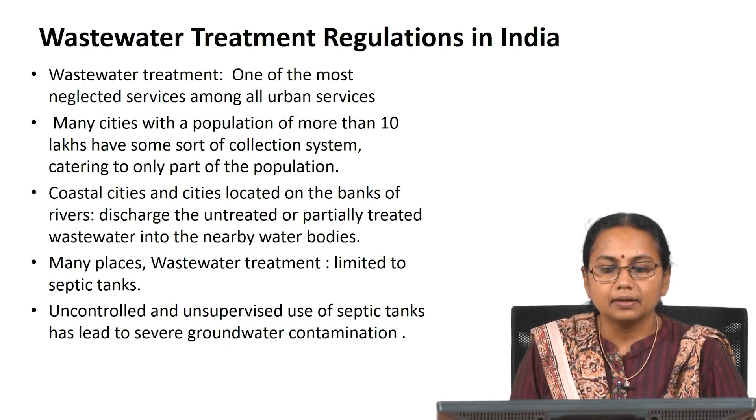We can see the wastewater management scenario in India in these slides. This is 2011 data. In 2011, around 39,000 to 40,000 million liters of water per day is generated in the domestic sector, whereas around 15,000 plus in the industrial sector.

Most of the time we think that industries are the most polluting sources, but the truth is the other way. Around 60% of the industrial wastewater is getting completely treated as per the norms, only 40% is getting discharged untreated. These are the small and micro level industries.

But when it comes to domestic wastewater, you can see here the domestic wastewater generated in urban India and rural India. Urban India generates around 40,000 million liters per day, and rural India generates around 77,000 plus. In urban India the treatment capacity is only around 11,000 plus, and in rural India it is only 772.

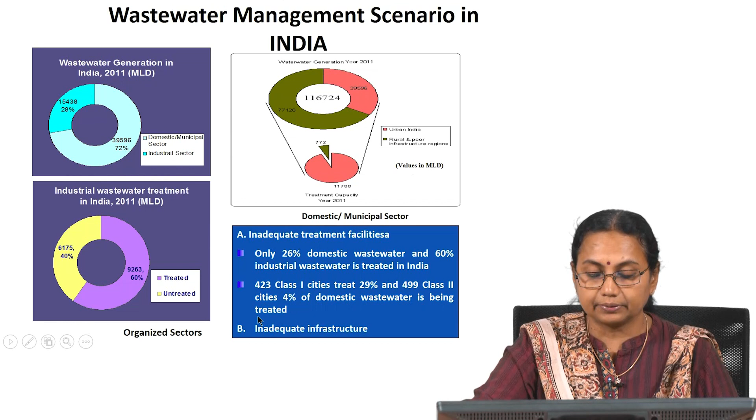You can see that only a very little part of the wastewater is getting treated. I have summarized here: only 26% of domestic wastewater and 60% of industrial wastewater is getting treated in India. 423 class 1 cities treat around 29%, and 499 class 2 cities treat around 4% of domestic wastewater. The major reason is inadequate infrastructure.

Now we know that a lot of emphasis is given on Swachh Bharat and cleaning and wastewater management and treatment. So if you create much more infrastructure, you see the condition here: treated wastewater is around 11,788 million liters per day, and untreated is around 27,808 million liters per day.

But in 2035, the treated wastewater quantity will definitely be increasing significantly. It may go up to 65,228 million liters per day. But you can see the untreated wastewater quantity is also increasing, becoming around 28,269.

The reason is, though infrastructure is developing, it is not able to meet the quantity of wastewater getting generated in India. As the population grows, the amount generated will be increasing significantly. This is the wastewater generation projected for the year 2035.

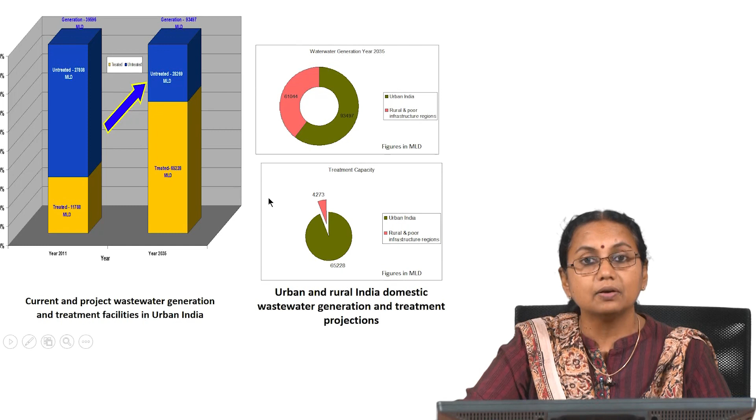This is rural, around 61,000 plus, and urban India around 93,000 plus, and rural treatment will be only 4,000 something, while urban India it will be around 65,228. So though the infrastructure develops, the pace at which it is developing, the coverage or the untreated wastewater getting into our rivers and water sources will be increasing day by day.

This shows the availability and type of toilets as per the 2011 census. In rural India in 2011, open defecation was very prevalent, around 67.3%. Now it has reduced significantly because of the Swachh Bharat campaign. Urban India also was not that good, around 12.6% was practicing open defecation.

Sewerage facilities were available in only 32.7% of urban India, and around 38.2% is still depending upon septic tanks, with so many other options also practiced in urban India. So if you see all over India, open defecation is still there, but if you look into sewerage coverage, it is only around 11.9 or 12%, and septic tank coverage is around 22.2%.

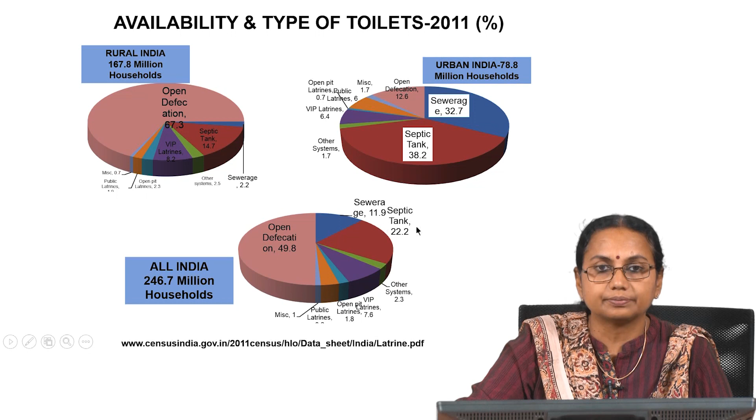So when we talk about wastewater management, we have to realize the ground reality. Most of the time when we talk about wastewater treatment, we think about a centralized treatment system, but that can be achieved only in places where there is sewerage coverage. So when the wastewater is not treated and gets into the rivers, what will happen? All our rivers are highly polluted.

So why should we bother about the pollution? Economic losses due to improper sanitation is huge. Around 73 million working days are lost due to waterborne diseases, and around $600 million are lost because of this per year, and around 6.4% of Indian GDP is lost due to improper sanitation. Economic loss in the tourism industry in India is around $448 million per year, because people want to go to a clean and pristine area for tourism, not a river like this, highly contaminated with domestic and industrial waste and solid waste.

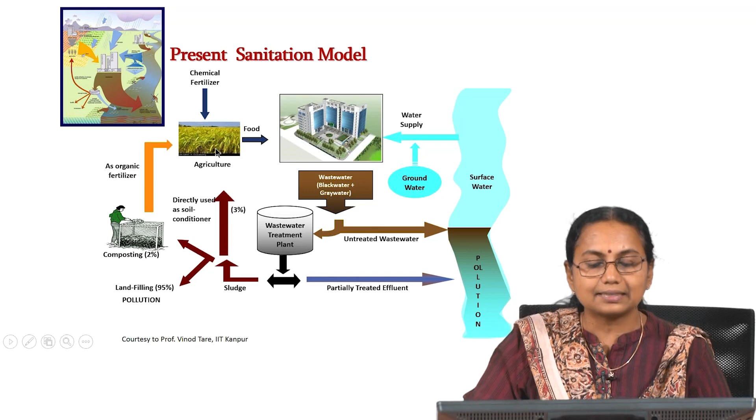So this is what is happening - all the chemicals, the untreated or partially treated wastewater, everything is going to the river. This river water is being used by cities downstream, so indirectly all of us are drinking the other person's wastewater without much hesitation.

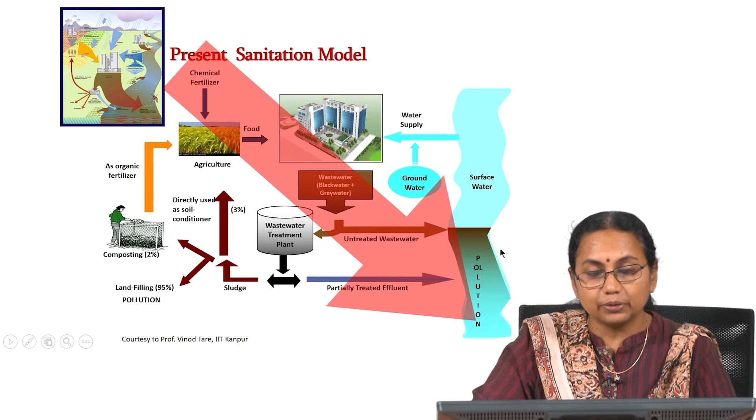When we talk about wastewater being treated and reused for various purposes, people have a psychological inhibition, but every day we are doing that without our knowledge. Today, wastewater management is based upon centralized wastewater treatment systems.

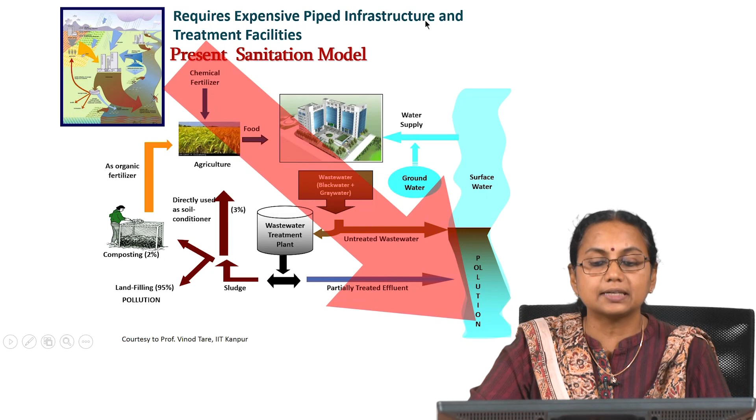Whatever wastewater is generated in the city is collected through pipelines, which we call sewers. To carry the waste through the sewer, we need large quantities of water, because otherwise solids will get deposited there. This requires expensive pipe infrastructure and treatment facilities, and encourages water consumption, because the pipe should have minimum velocity, otherwise all the solids will accumulate and clog the pipeline.

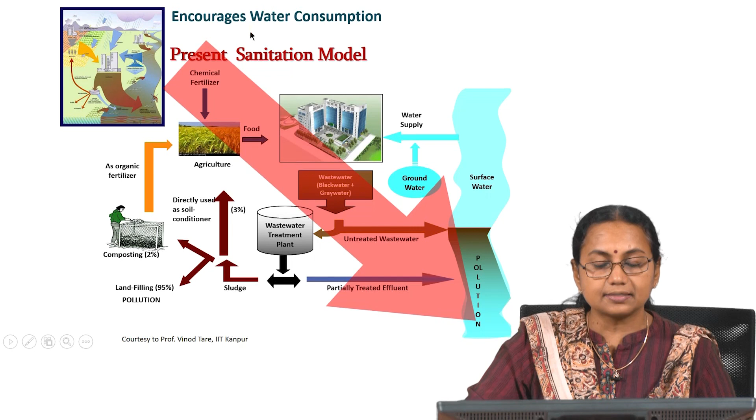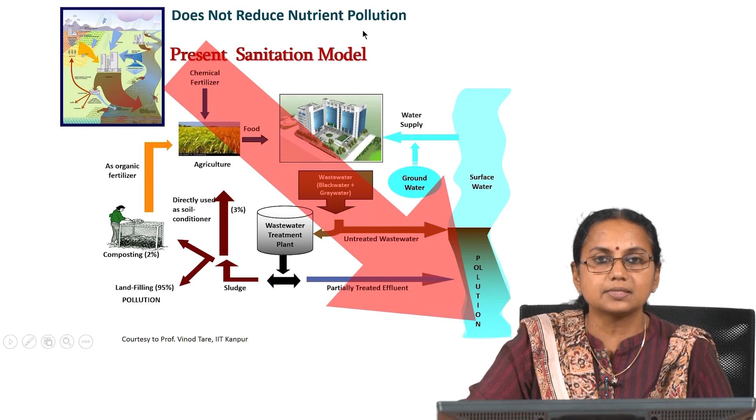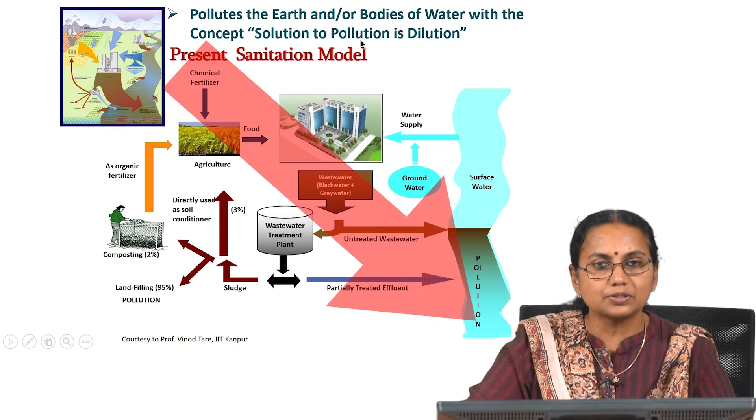So centralized wastewater treatment systems encourage water consumption, and most of our treatment systems do not reduce nutrient pollution, because they are not designed for that. This pollutes the earth and water bodies, with the concept that the solution to pollution is dilution, but our rivers do not have much water, so entire water bodies are getting contaminated. It is not sustainable.

Now there is a paradigm shift in the recent past. In the past, wastewater was considered a problem; now it is considered a resource. In many places, zero liquid discharge is being practiced - whatever wastewater is generated, you treat it to the required level for the specified beneficial use and recycle it completely within the community or facility. That is known as zero liquid discharge, meaning no liquid is getting discharged.

Examples are many - the NEWater scheme in Singapore, where the entire water is treated and put into rivers and lakes, and they are reusing it.

Treated domestic wastewater for industrial use; even in Chennai many industries are practicing this. Zero discharge norms for major industries, and it is coming in a big way wherever water stress is there. And recycled water for domestic use, may not be for drinking purposes, but for all other secondary uses like toilet flushing, gardening, cleaning, etc. Treated wastewater for groundwater recharge and irrigation.

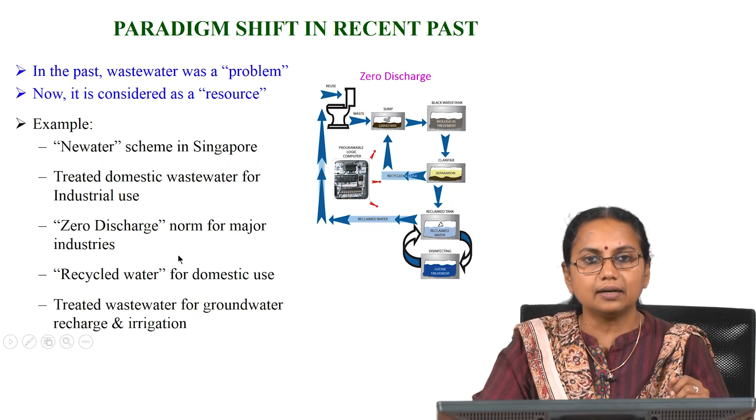Here we have to be extremely careful. If you want to use the treated wastewater for groundwater recharge, the quality of the treated wastewater should be as good as drinking water. Otherwise, what happens? The groundwater will get contaminated. Once the groundwater gets contaminated, treating it will be very, very difficult.

So, when we talk about wastewater reuse, the treated wastewater can be reused for multiple purposes, like recreational and environmental uses. For regenerating lakes and ponds we can use properly treated wastewater, otherwise it will lead to much more problems. Marsh enhancement, stream flow augmentation, because if the rivers are not having the environmental flow, how can we get the water? You treat all the wastewater to the required quality and put it back to the river, so that stream flow augmentation can happen. Then it can be used for fisheries and for wetlands.

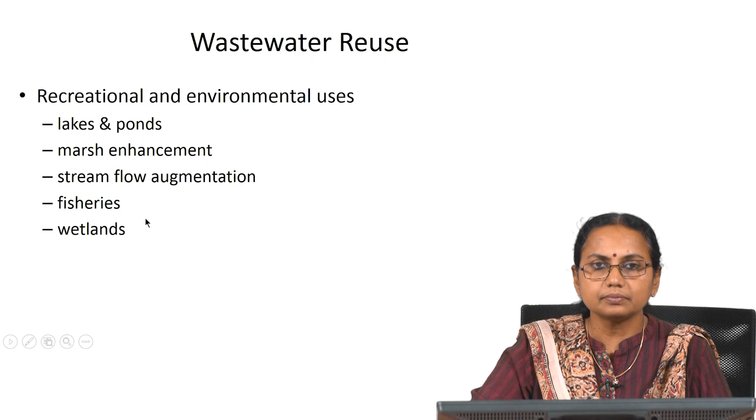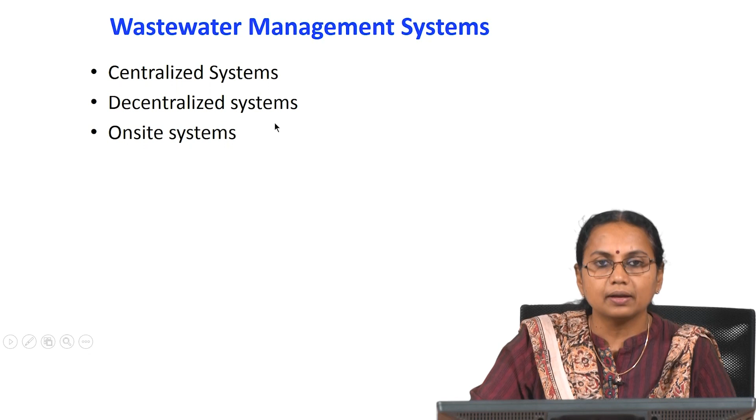Then when we come to wastewater management systems, usually we classify them into three categories: centralized systems, decentralized systems and on-site systems. So, when we talk about a city or a town, if you want to achieve 100% wastewater management, it should be a combination of centralized systems, decentralized systems and on-site treatment systems. Now, we will see what these centralized and decentralized systems are.

So, a centralized wastewater treatment system means all the wastewater generated in the city or town is collected through pipelines. These pipelines may be hundreds of kilometers long, and all the wastewater is collected and taken to a low-lying area in the outskirts of the city, wherever you have enough land, treated there and discharged. That is the centralized treatment system.

This is one of the towns in Tamil Nadu, Trichy. Here you can see an example of a centralized sewage treatment system. These are the pipelines, all the sewer lines, and all the wastewater is getting collected and brought to an area here, and here it is getting treated far away from the city.

But here we have problems. Some areas which are low lying compared to the major pipeline are very difficult to connect to the existing sewer systems. The reason is, if you want to get connected, we have to have pumping stations and all. So, the operation and maintenance cost of such systems will be huge. So, it is advisable to have a centralized system, and

whichever area is not possible to connect to the centralized sewer system can have a decentralized wastewater treatment system. That means, for that location you provide a small treatment. And if you have some isolated houses, providing the sewer network will be very costly. In such cases you can go for an on-site treatment system. That means, only for a single house or a cluster of houses you can have a very small treatment system.

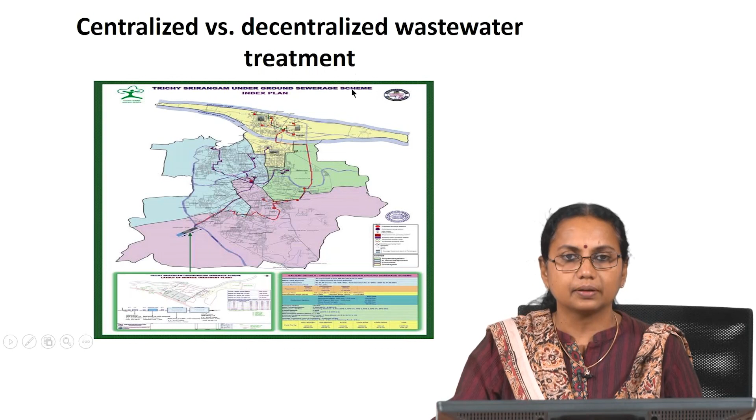So, this is a centralized wastewater treatment system. That means the entire wastewater is collected through the sewer network, transported to a far away place, treated and discharged there. In a decentralized wastewater management system, what we are doing is, wherever the wastewater is generated, in that area itself it is getting collected and treated.

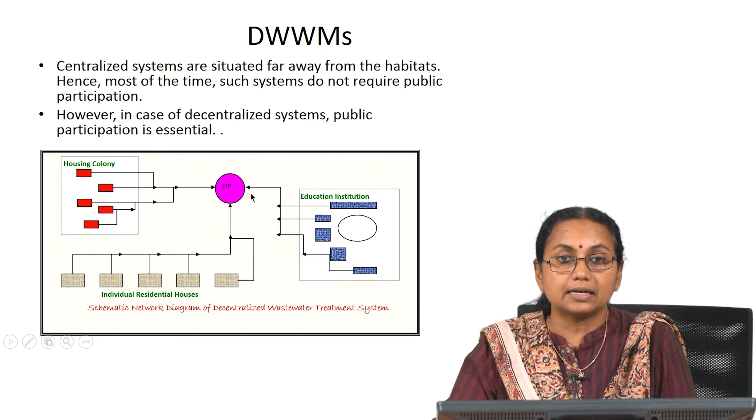So, if you are thinking of reusing the treated wastewater, it is always economical to go for decentralized wastewater treatment systems, because in a centralized system we are taking all the wastewater to a place far away from where it is generated. Then if you want to reuse it, you have to pump it back to the place where it is required, so the pumping cost will be very high. Here we are treating the wastewater wherever it is generated, so reuse will be much easier.

So, on-site treatment systems means for individual houses or a cluster of houses we are providing the wastewater treatment systems, and in India, the on-site treatment system mostly consists of a septic tank.

Because in the septic tank around 50 to 60% of organic matter removal is taking place, and a large number of pathogens will be coming out in the septic tank effluent. So, if you just discharge it into the open drains, there will be significant groundwater contamination. So, here what we are doing is spreading it into a large area in the soil. So, soil acts as the treatment medium, and the waste is getting treated.

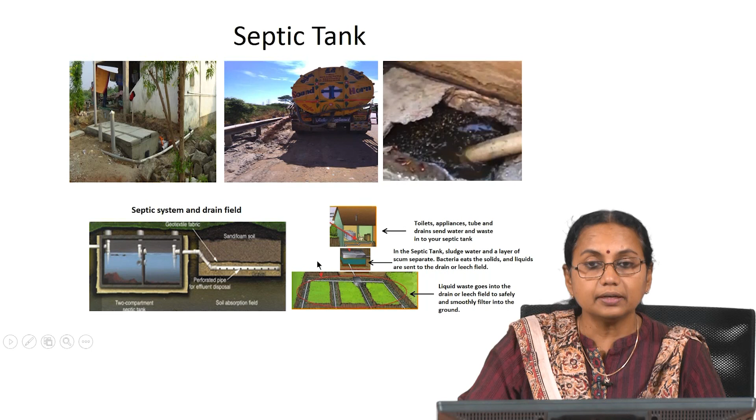So, problems of improper wastewater management we have already discussed. Contamination of surface water sources: most of the rivers in India, we can talk about Ganga, Yamuna, Adyar, Coovum, any river you take, are getting contaminated. And if you are not designing and operating the on-site treatment system properly, again contamination of groundwater can happen.

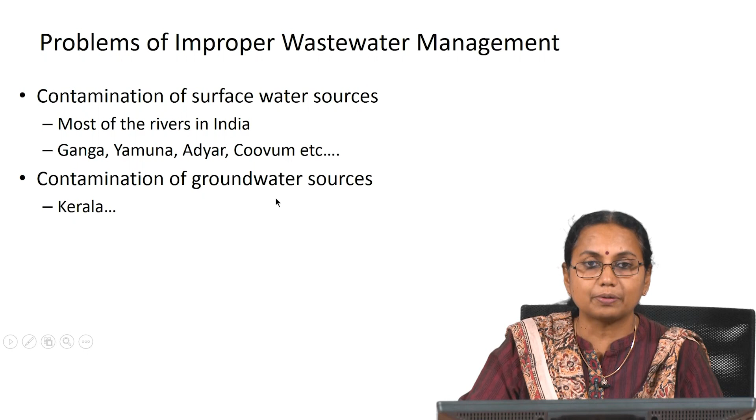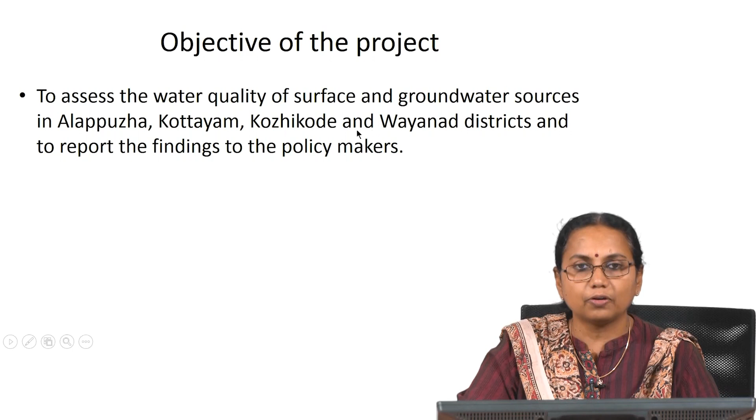I will talk to you about an example from Kerala. So, this is the case study from Kerala. We all know that in Kerala open defecation is almost nil, and all social development indices are very good. They have very nice rivers, and mostly the environment is clean, but what is the status of the groundwater? So, we have done a study to monitor the surface and groundwater quality in 4 districts of Kerala, just to find out how the quality is.

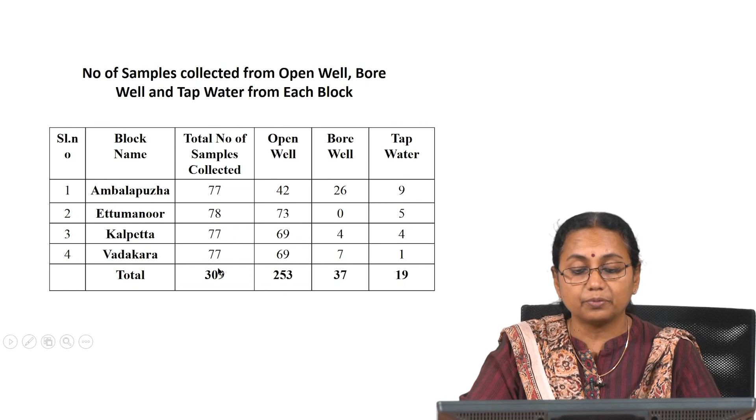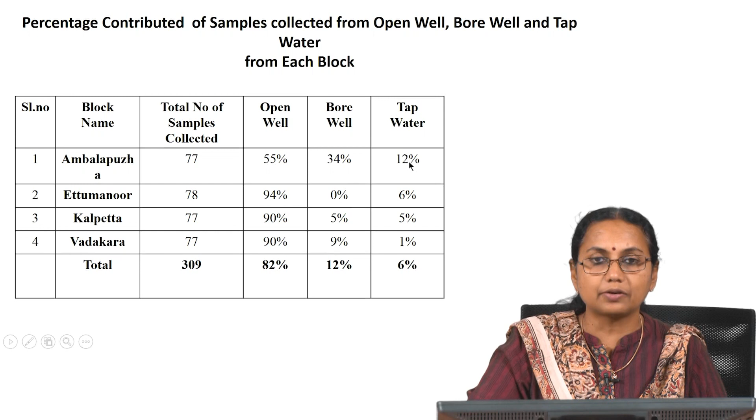So, we collected around 309 samples from open wells, bore wells and tap water. Here the number and percentage of open wells, bore wells and tap water I have shown. You can see the bacteriological quality in open wells in all the 4 blocks during monsoon: around 68% of the wells are having fecal contamination and only 32% wells are free from it. After monsoon, it is around 58% and 42%.

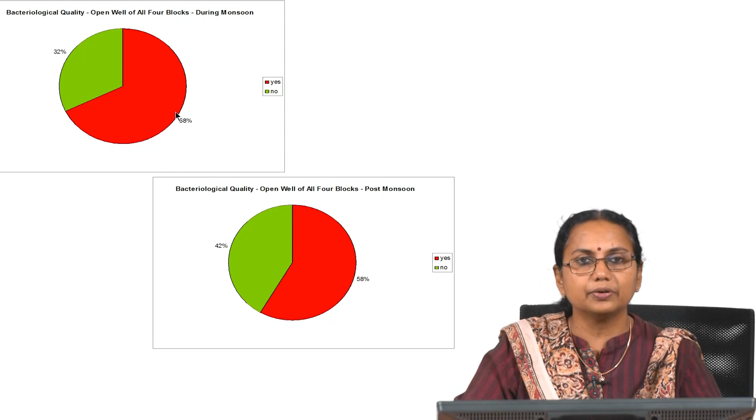Because the groundwater table is very high, things are getting into the groundwater. In open wells, many times they do the disinfection in the well itself, so many wells are getting cleaned. But many times the bore well is dug in the open well. So, the chlorination is not effective and the aquifers are getting interconnected. So, the bore well is contaminated and disinfection is not happening; that is why the bore well is showing much more contamination.

Now, we will look into what are the wastewater treatment systems, or how can we treat the wastewater. Usually the wastewater system generally comprises of 3 parts. We have a primary treatment, a secondary treatment and a tertiary treatment. The objective of the primary treatment is to remove suspended, easily settleable and floating material, and secondary treatment is provided to remove colloidal and dissolved organic matter, and tertiary treatment systems are provided for polishing the secondary treated effluent to meet the reuse or discharge requirements.

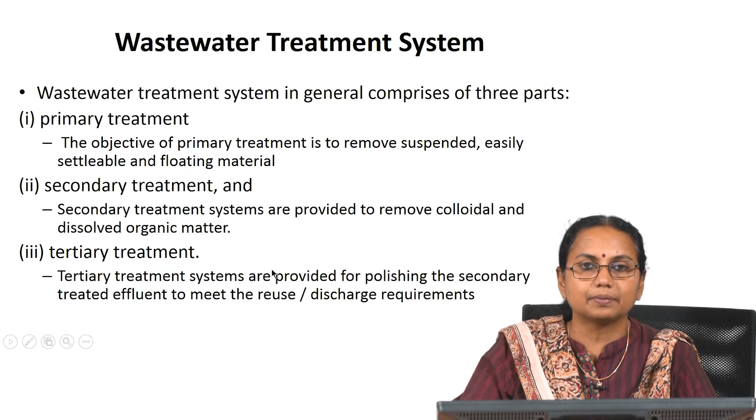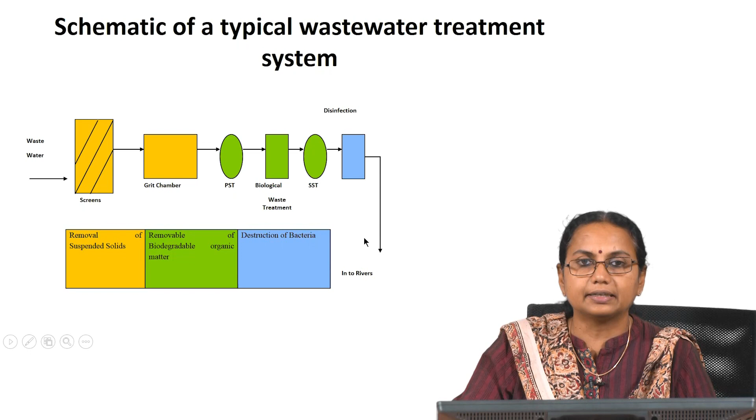This yellow color shows the treatment units used for removal of suspended solids, green for removal of biodegradable organic matter, and blue for destruction of bacteria, and after that it is discharged to rivers. But if you want to reuse it, we have to give further treatment. So we can treat the raw wastewater in a better way and recycle within the system.

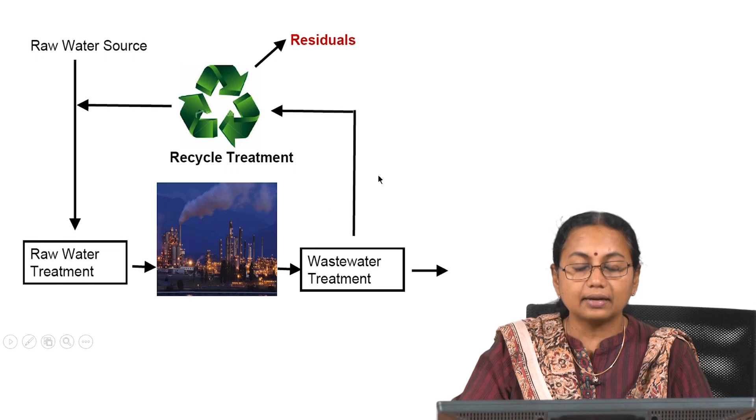So, what are the wastewater treatment processes and technology? There is no dearth of technologies. We have n number of technologies available for the treatment of wastewater. A few are waste stabilization ponds, constructed wetlands. These are engineered natural systems, cost effective, and you do not need any electricity or mechanical devices. Then UASB, upflow anaerobic sludge blanket reactor, moving bed biofilm reactor, activated sludge process, extended aeration process, sequential batch reactor, membrane bioreactor. Like that we have all types of technologies available; depending upon the treatment quality requirement and your space availability, you can select appropriate treatment technologies.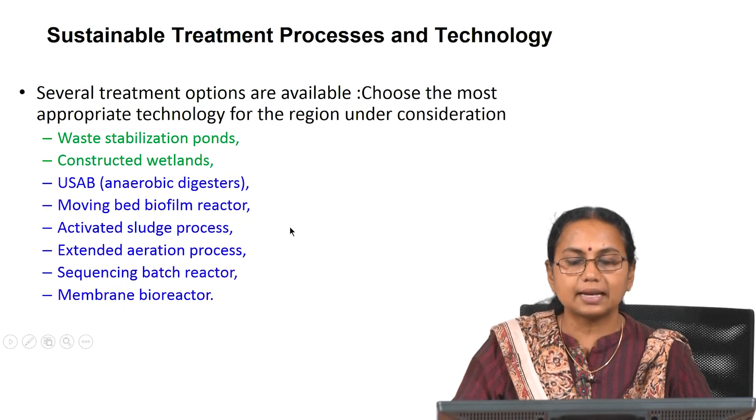And in wastewater, especially for domestic wastewater, most of the time we go for biological process. The reason is the wastewater will be containing a lot of suspended, colloidal and dissolved organic matter which are highly biodegradable. So, instead of going for chemical processes, we usually adopt biological process.

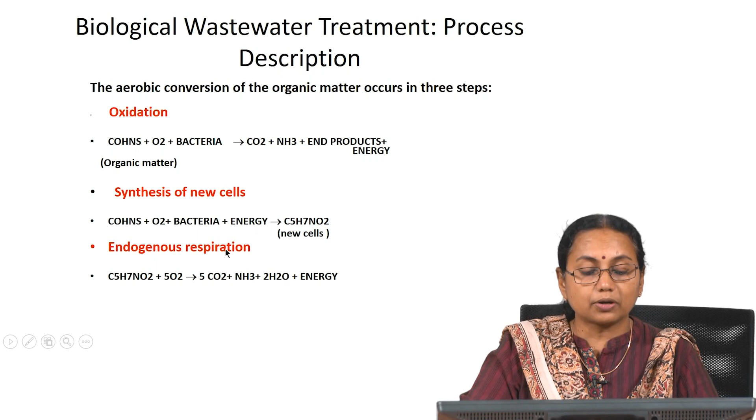In aerobic process, what happens? Your organic matter, in presence of oxygen, bacteria or other microorganisms convert the organic matter to carbon dioxide, ammonia and end products. Some energy also will be generated. This energy will be utilized for the synthesis of new cells. The new cell synthesis is like this: organic matter, oxygen, bacteria, energy is generated and it is giving new cells. And sometimes, if the organic matter content is less, the microorganisms will use the existing microbes and they get the energy.

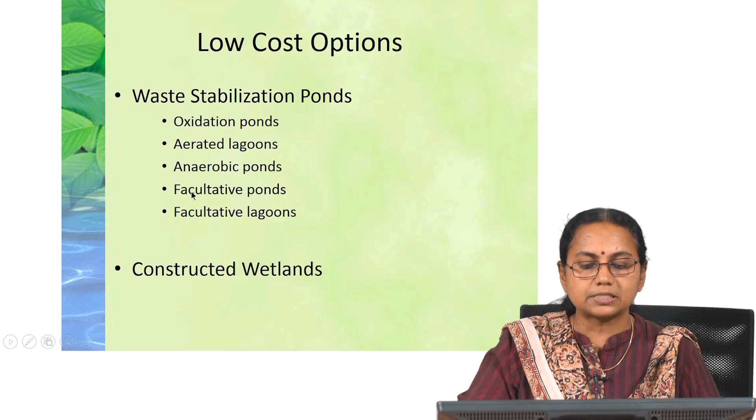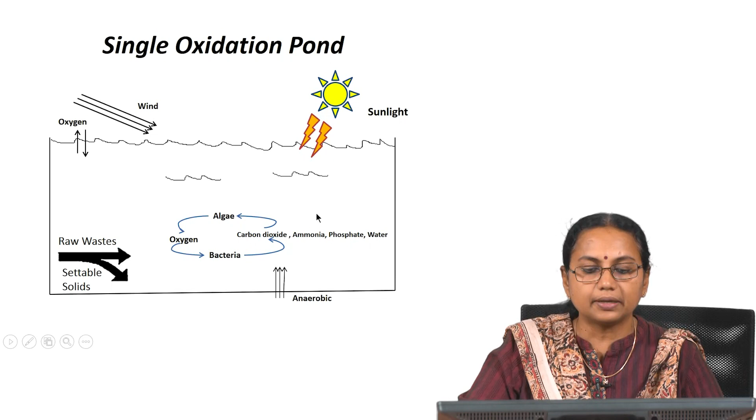And low cost options, as I told, you have oxidation pond, aerated lagoon, anaerobic ponds, facultative lagoons, constructed wetlands. This is a single oxidation pond. Here you can see that a symbiotic action of algae and bacteria is happening, and as a result the treatment is happening. And this is a constructed wetland. Here you have a watertight tank and you will be having plants and the matrix on which the microorganisms also will be there. So, you have a combination of physical, chemical and biological action taking place, and you will be getting the treated wastewater.

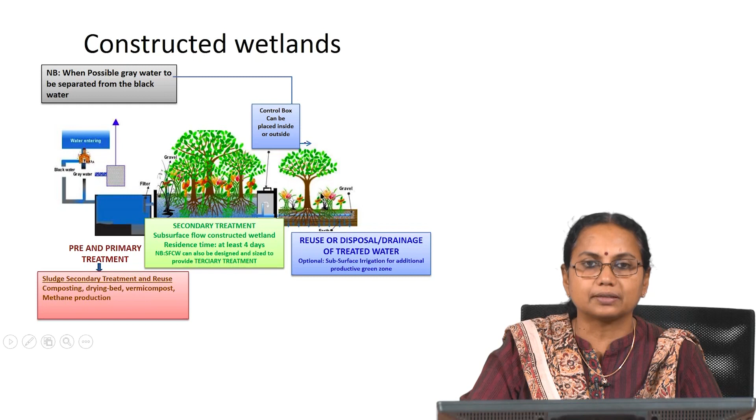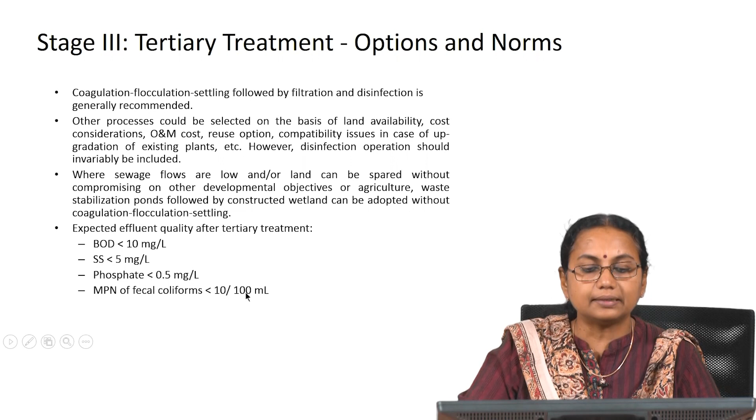And tertiary treatment, as I explained already, based upon the treated wastewater use, you can select your tertiary treatment. Either you can go for coagulation, flocculation or other process. Most of the time for toilet flushing or other secondary uses, the expected quality of tertiary treated water is BOD less than 10, suspended solids less than 5, phosphate around 0.5, MPN less than 10 per 100 millilitre. And tertiary treatment can be nutrient removal, phosphorus removal, chlorination, carbon adsorption or dual media filter, ultrafiltration, or even you can go for reverse osmosis and disinfection.

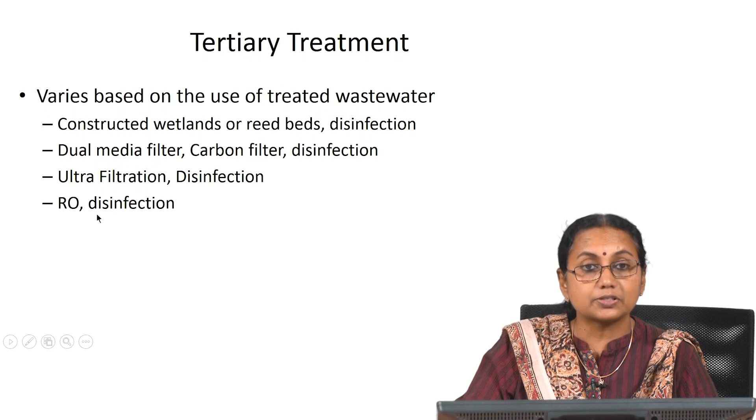So, what is the present scenario? Wherever wastewater is collected, mostly treatment plants are not there. Places where treatment plants exist, enough wastewater is not collected. Wholesome approach is missing in many places. But now cities are coming up with city sanitation plans. Most of the time the funds are provided only for asset creation; operation and maintenance is not available.

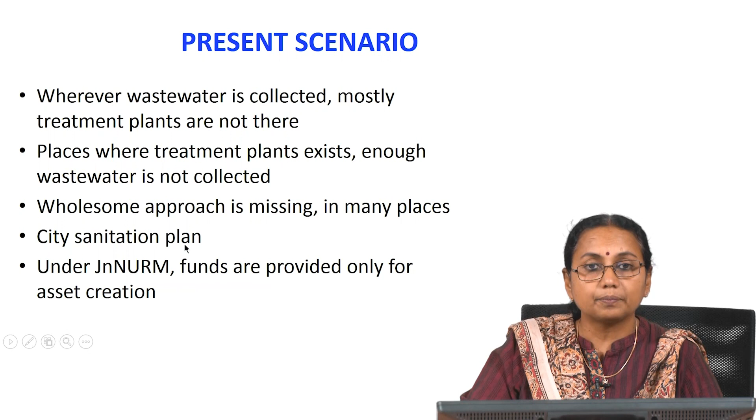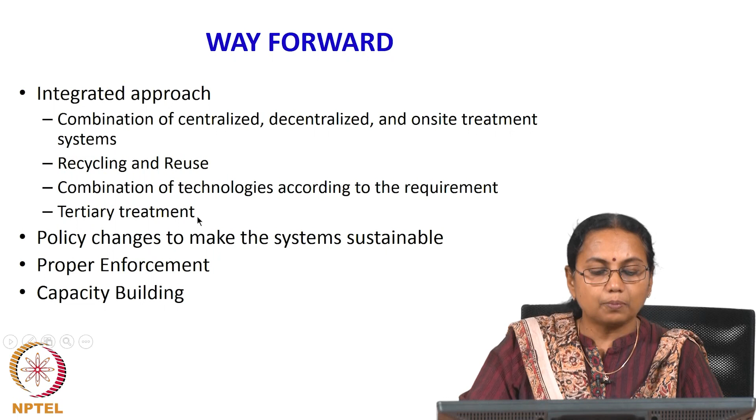So, what is the way forward? An integrated approach is needed. Combination of centralized, decentralized and on-site treatment systems; recycling and reuse has to be practiced. Combination of technologies according to the requirement. Then we have to give tertiary treatment also. Policy changes to make the system sustainable are essential. Proper enforcement and capacity building is also needed.